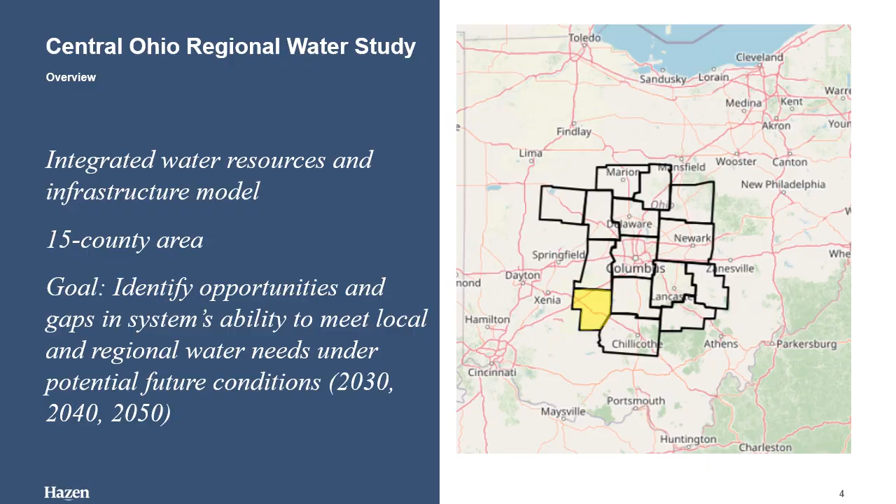Project objectives were identified for the Central Ohio Regional Water Study. The objectives include improve, maintain, and optimize resources while planning for growth. Results of the model were used to evaluate opportunities to secure safe and reliable water supply for public use, consider reuse water for non-potable needs, and identify areas of capacity limitations. Future solutions were required to maintain beneficial use of water required for recreation, wildlife, and economic growth.

Collaboration and regionalization: the project created a dashboard planning tool that will serve as a focal point for collaboration between utilities and state agencies, helping to ensure best use of both water and financial resources.

Maximize funding impacts through sustainable infrastructure improvements. Using the analytic capabilities in the dashboard, state agencies can now and will in the future be able to help identify funding to build the infrastructure needed to meet the long-term needs for the region and identify future needs. The project also provides information to the state agencies on how stormwater and surface waters will be impacted by growth and development. The project can be used to identify opportunities to help mitigate impacts of development on the environment.

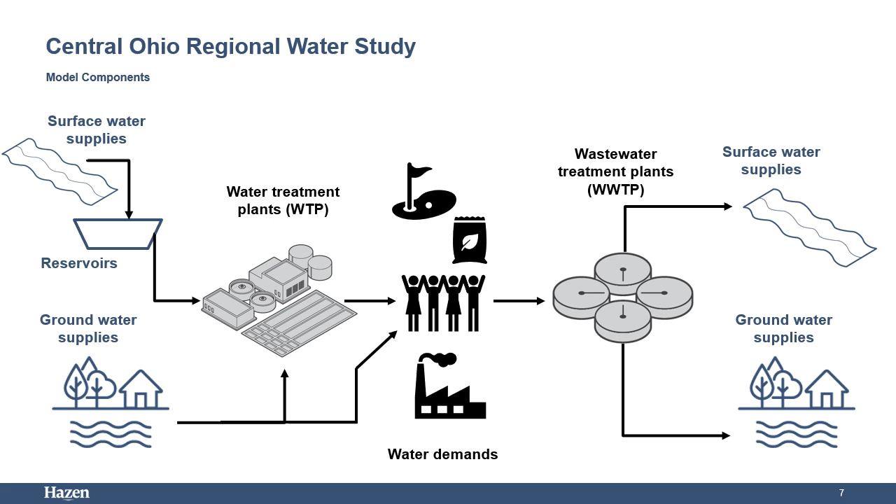This presentation will focus on the current and future supply and demand for water resources in Fayette County, estimated at the HUC 10 watershed level.

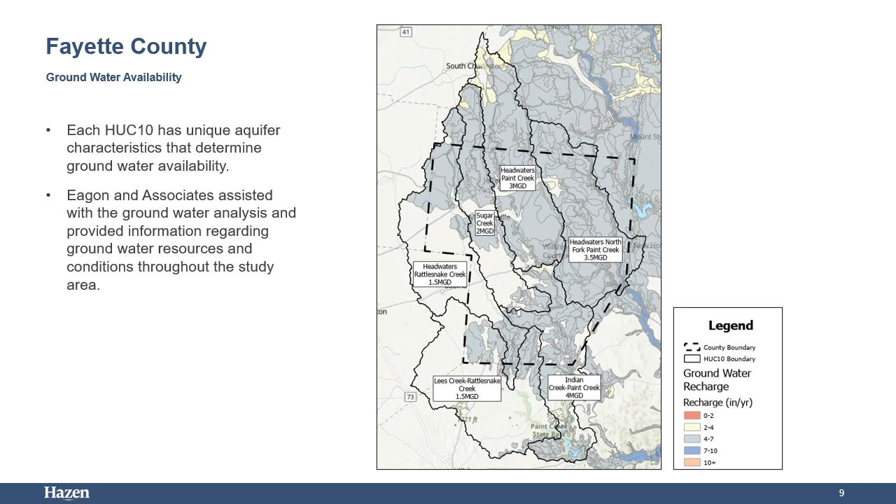Surface water availability is the cumulative sum of surface water from all watersheds in the county. However, surface water availability will vary for each stream location. Fayette County is estimated to have approximately 5.5 million gallons per day of surface water availability.

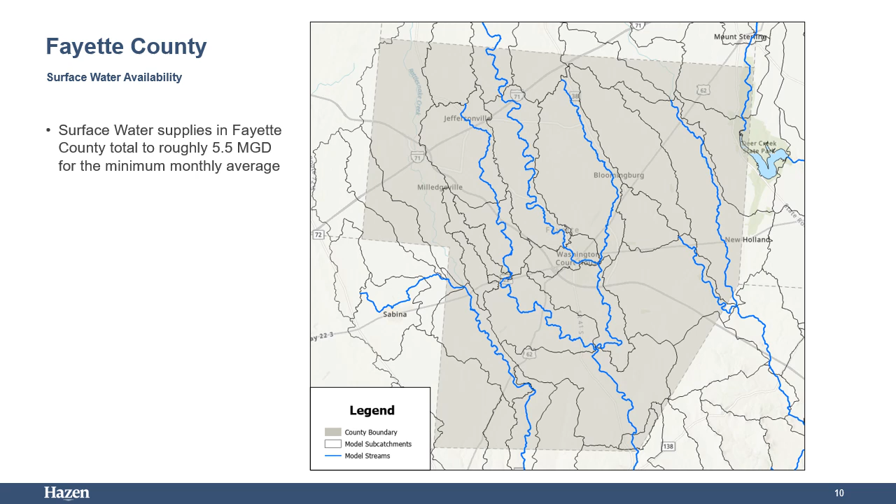Adding both the groundwater and surface water supplies together, it is estimated that Fayette County has roughly 21 million gallons per day of total available raw water supply. This supply availability is roughly 70% groundwater and 30% surface water.

Supply availability at the sub-county level varies by location based on aquifer yields and surface water tributary area, as presented on the previous slides. The next focus for this resource evaluation was the existing and future demands that draw raw source water from the available water resources.

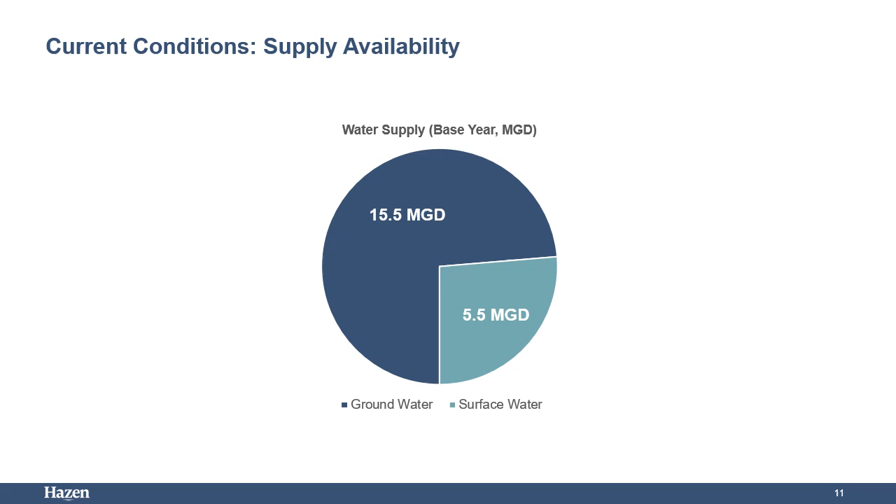Data on water demand was developed using population data, which was available on a regional basis. The information on current county population was obtained from MORPC, the Mid-Ohio Regional Planning Commission. These population data were used to further calculate water demand.

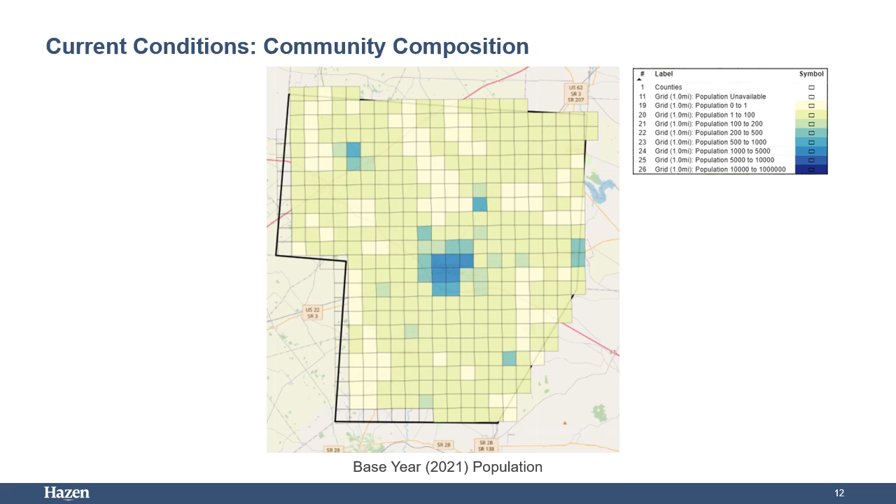The map on the slide is a heat map indicating the current estimated population distribution within the county. This estimate is for the year 2021, which is the year that the current conditions are based upon. Areas in blue tones are more densely populated, while the yellow tones indicate a less densely populated area. The darker areas in the center of the county indicate the population in the Washington Court House area.

A per capita water use was calculated for each service area. This was calculated by taking the water production data and dividing by the assumed population within a service area, which resulted in a per capita water use of gallons per person per day. This per capita water use includes all types of users within the service area, whether it is residential, commercial, or industrial.

It is important to note that in future conditions, no service area expansion was assumed, and the water per capita use for each utility was assumed to stay the same. This means that growth in projected population would also mean a proportional growth in commercial and industrial demand within the utility service area boundary. For future water demands, the per capita water use was multiplied by the assumed future population within a service area.

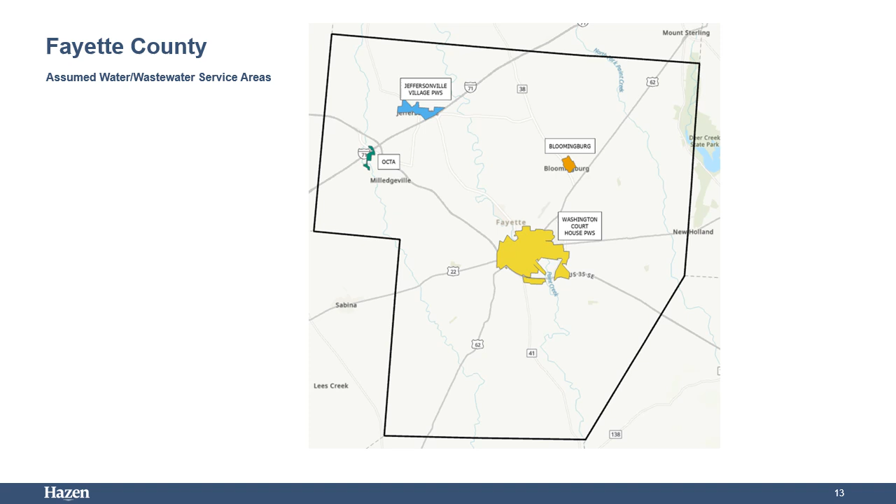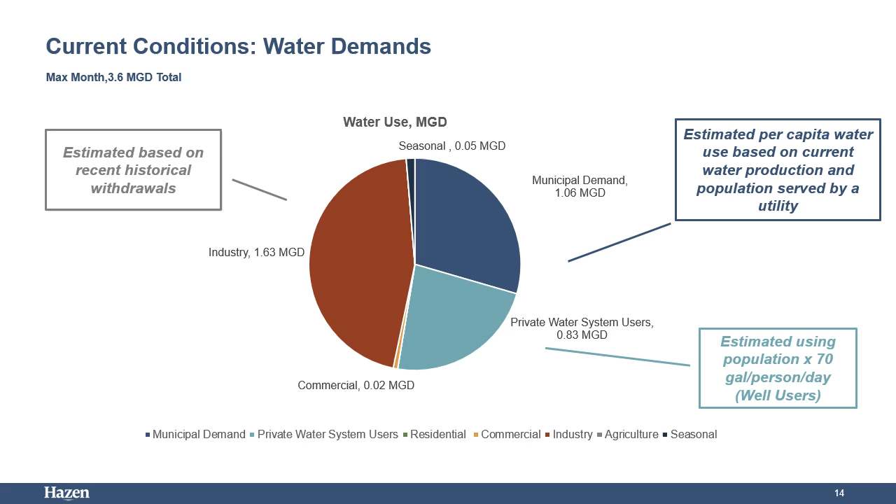The municipal portion, which represents the second largest water demand, also has an associated wastewater component. The wastewater flow component in the county includes the used water from the service areas in addition to an inflow and infiltration component, which was estimated and included in the wastewater flow.

For the current condition, the maximum annual average wastewater flows are approximately 5 million gallons per day at the county level. The annual average wastewater flows were analyzed rather than the maximum month flows, as was done for water. This is due to the wet weather impacts observed in wastewater due to the inflow and infiltration impact.

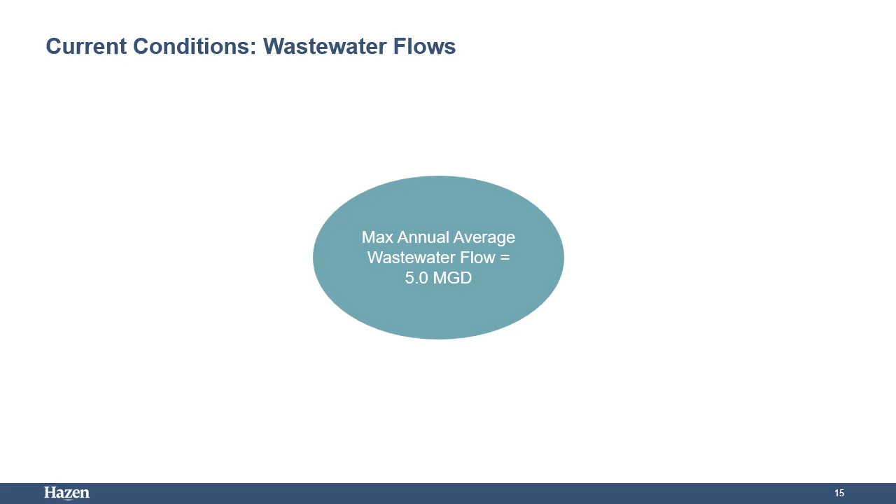During rain conditions, areas with combined sewer systems could see very high flow rates, while during dry times only the base flow is observed. High rainfall in a single month could skew the average. Therefore, an overall annual calculation is used to determine if a particular plant is nearing its permitted treatment capacity limit.

The existing demands and flows can be compared to the existing infrastructure. In Fayette County, there are a number of water treatment plant facilities, and their total capacity is just over 6.8 million gallons per day. Roughly 37% of that source water is pulled from groundwater and 63% is pulled from surface water, or the local streams and rivers. Remember that the total maximum daily water demands are about 3.6 million gallons per day. So, in the current conditions, the county has sufficient capacity to provide treated water to meet demands.

From a wastewater treatment plant capacity standpoint, the county has just over 7.3 million gallons per day of permitted capacity at the existing facilities across the county. The current maximum annual average wastewater flows generated by the demand and inflow and infiltration are about 5 million gallons per day. Again, the existing county infrastructure is sufficient to meet the current wastewater flows.

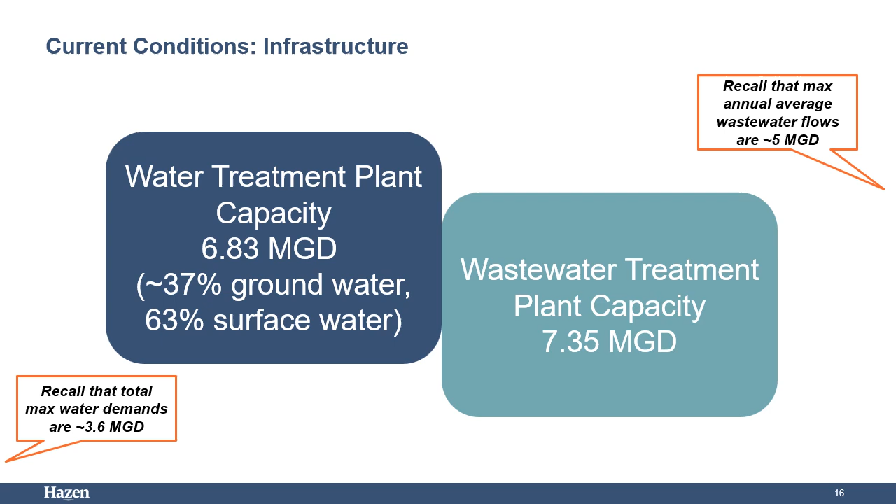With an understanding of the current conditions in the county, the next step was to expand the analysis and explore potential future conditions. This study evaluated conditions in 2030, 2040, and 2050. When analyzing future conditions, current data is projected from the present to the future in time. With that projection comes uncertainty, which is why analyzing multiple potential future scenarios can provide more resiliency and reduce the risk of failure. Scenario planning acknowledges there are several plausible future conditions that may occur and allows planning for several possible future conditions.

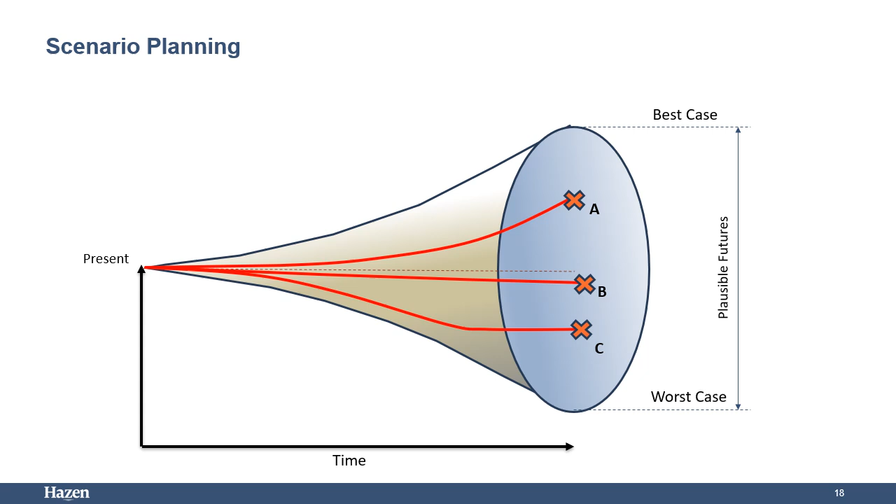On the left side of the cone, there is only one point because current conditions are known. As time goes on, the cone of uncertainty expands and the range of possible future conditions widens. The widening could indicate divergence among the scenarios and changes in the recommended project that aligns with that scenario. Analyzing several scenarios or plausible futures helps ready the region for ending up in future A, B, or C, and knowing the projects to implement all along the way.

Four model scenarios were developed to define the range of potential futures. Scenario conditions that were explored were two different precipitation and temperature changes and two different population estimates, totaling four different model scenarios. The different inputs of these scenarios will be explored further on the following slides.

Two population sources were used for the scenario modeling. The expected growth trend was informed by the Mid-Ohio Regional Planning Commission, or MORPC. The MORPC population projections were informed by local zoning and land use plans. The historical growth trend was informed by the Ohio Department of Development, or ODOD. The ODOD population projections are informed by historical birth, death, and migration trends. The population projections were used to estimate the future increases in municipal water demands and private water system demands over time.

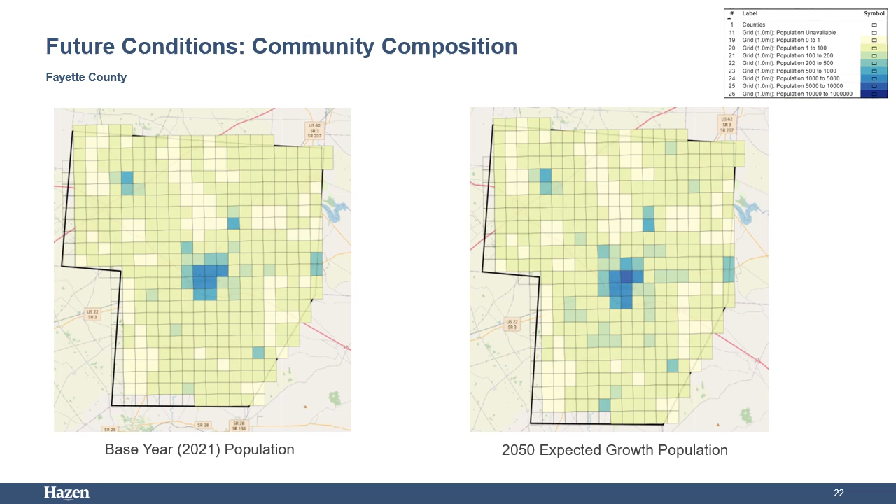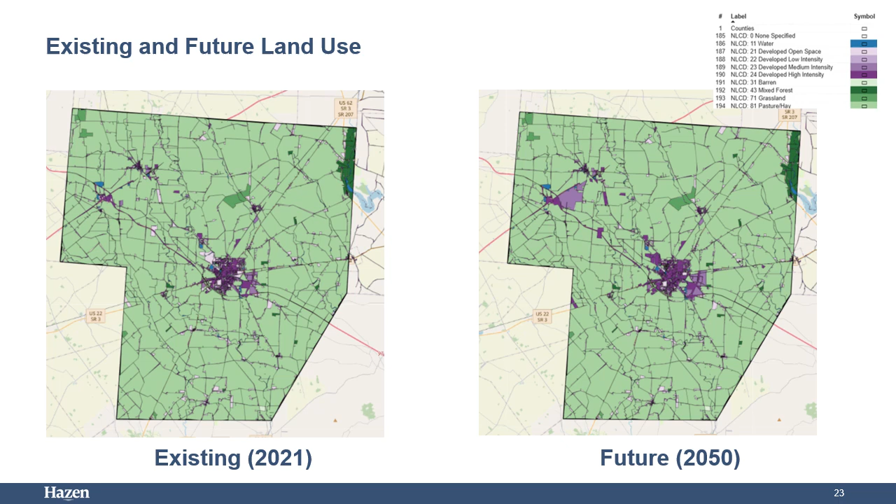Another element of the scenario modeling are the different temperature and precipitation scenarios projected. Historical precipitation and temperature data from 1983 through 2022 were used to estimate the surface water runoff and evaporation. For the future conditions, change factors were applied to the historical precipitation and temperature data to analyze the effects it may have on surface water availability.

Temperature and precipitation changes were based on the global climate model data downscaled to the Central Ohio area. There are different change factors for each month and future planning year, 2030, 2040, and 2050. Change factors were extracted from an ensemble of 49 global climate models from the Intergovernmental Panel on Climate Change.

Two climatic conditions scenarios were selected for evaluation of future conditions: a moderate climate scenario and a hot and dry scenario. The moderate change scenario represents the middle of the road and utilizes the 50th percentile change factor for both temperature and precipitation from the ensemble of global climate model data. The top left graph shows the 50th percentile change factors for precipitation, and the bottom left graph shows the 50th percentile change factors for temperature. As the graph indicates, there is a greater change projected for temperature over the planning horizon.

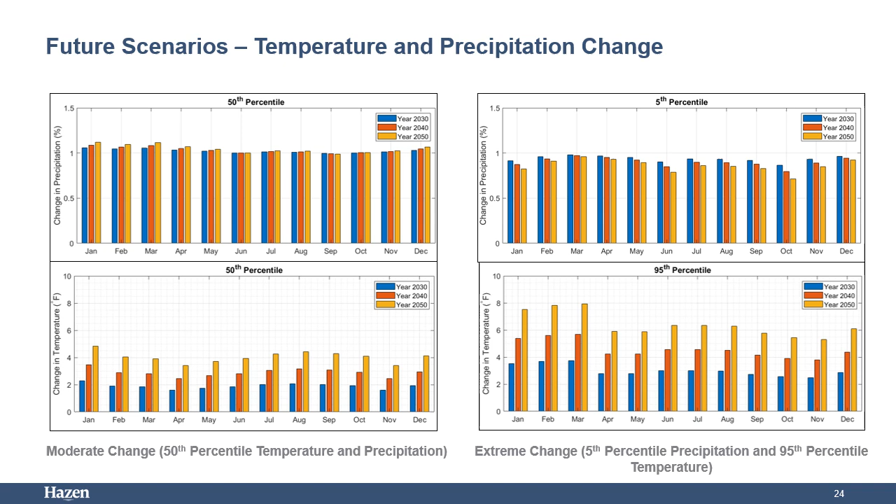The extreme change scenario that was modeled is the hot and dry scenario, which utilizes the 5th percentile change factor for precipitation and the 95th percentile change factor for temperature. The top right graph shows the 5th percentile change factors for precipitation, and the bottom right graph shows the 95th percentile change factors for temperature. A scenario with no future temperature and precipitation change factors was also evaluated. The two temperature and precipitation conditions affect the future raw water supply availability, as the two different population estimates affect the future water demands.

And lastly, the resource abundance scenario consists of the 50th percentile temperature and precipitation change factors and the historical growth population estimates. These 4 scenarios allow for planning of what different supply and demand conditions may look like and how those conditions compare to the infrastructure needed.

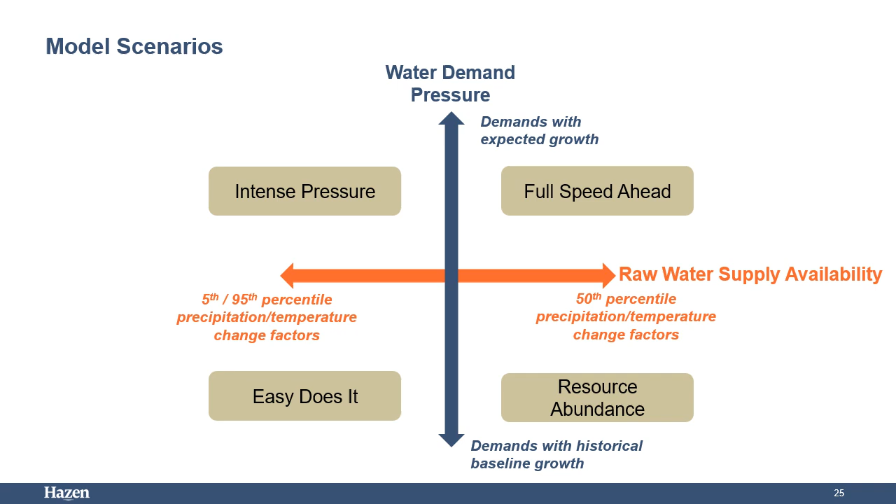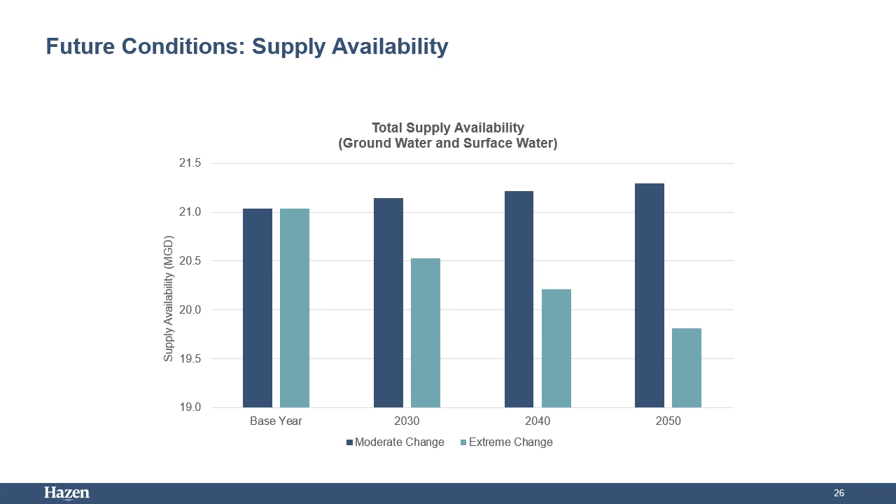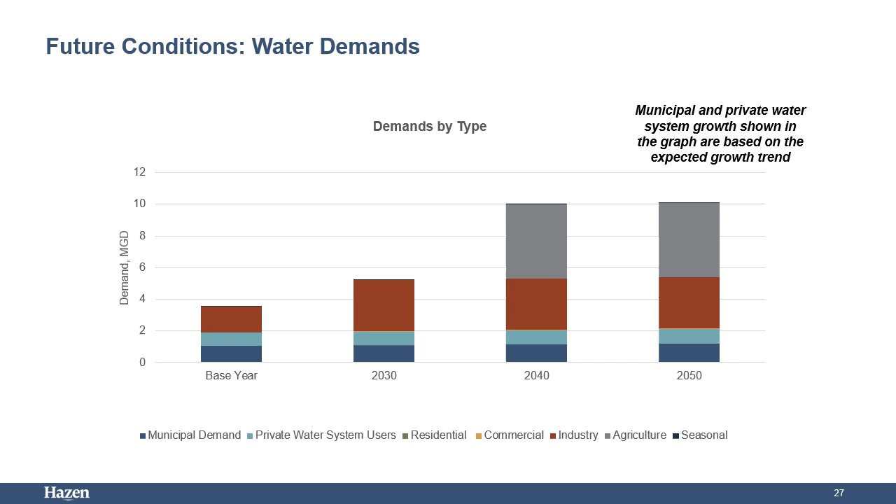The Ohio State University was consulted about assumed increases in future agricultural irrigation water demands. It is estimated that by 2040, agriculture fields will need at least 5 inches of irrigated water during the critical growing season, which occurs between July and September. Based upon this information, the team reviewed future land use to identify where agricultural fields are expected to be in 2040 and 2050, and calculated the water demand that would be needed for 5 inches of irrigation across those agricultural fields. These irrigation demands are present for the 2040 and 2050 condition and are assumed to use groundwater for source water.

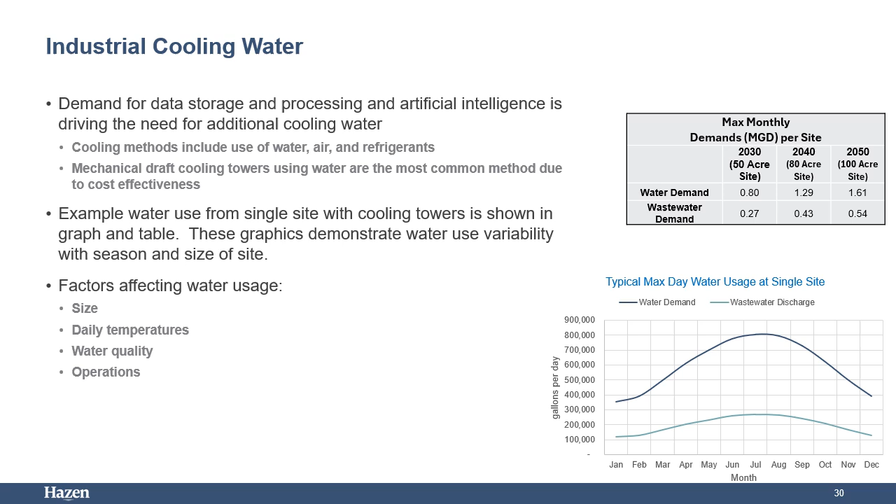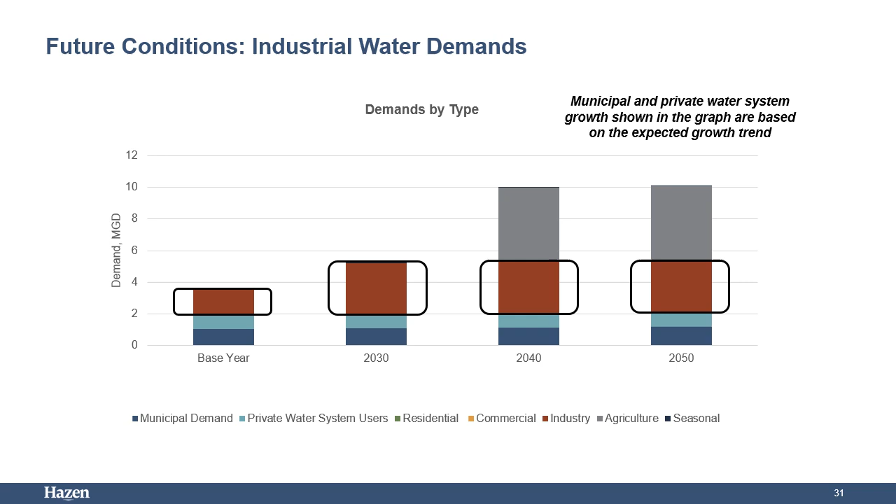Previously, the current water and wastewater capacities were explored at the county level. There are currently no future new or increased infrastructure capacities that were modeled for Fayette County. Therefore, the current water and wastewater capacities were assumed to remain constant through 2050.

Since the demands are less than the water treatment capacity and less than the raw water supplies for all years in the planning period, the treatment capacity and raw water supplies are sufficient to meet municipal demands at the county level.

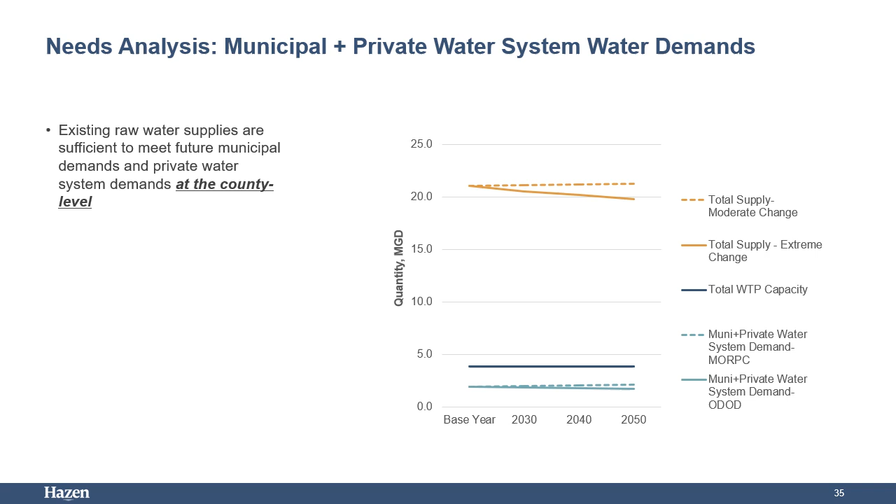However, it should be noted that a large industrial demand was not included in these figures, as its future water demand is met by another county outside of the study area. Though, with the growth of additional non-municipal, non-agricultural demands, water treatment capacity would be stressed.

Similar to the previous slide, these demands do not include an industrial demand that is met by another county outside of the study area. Additionally, future agriculture demands are not expected to be met by municipal water treatment plants, and therefore water treatment is not a limiting factor for growth in the county.

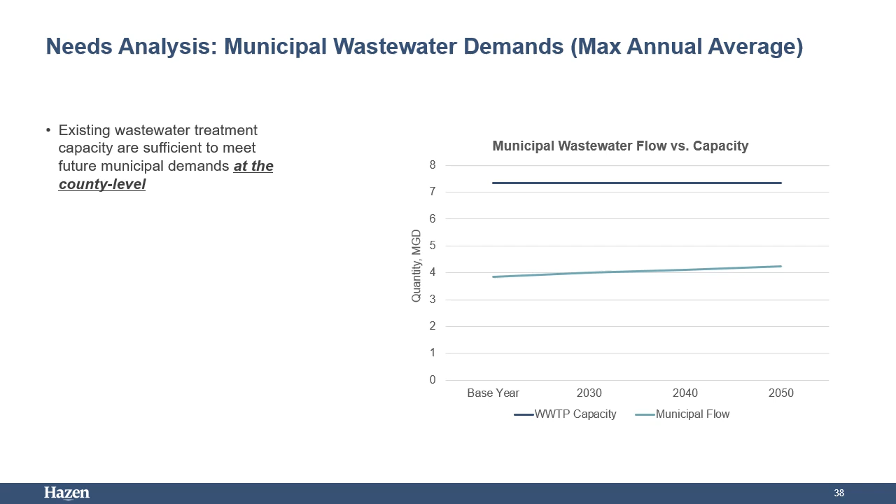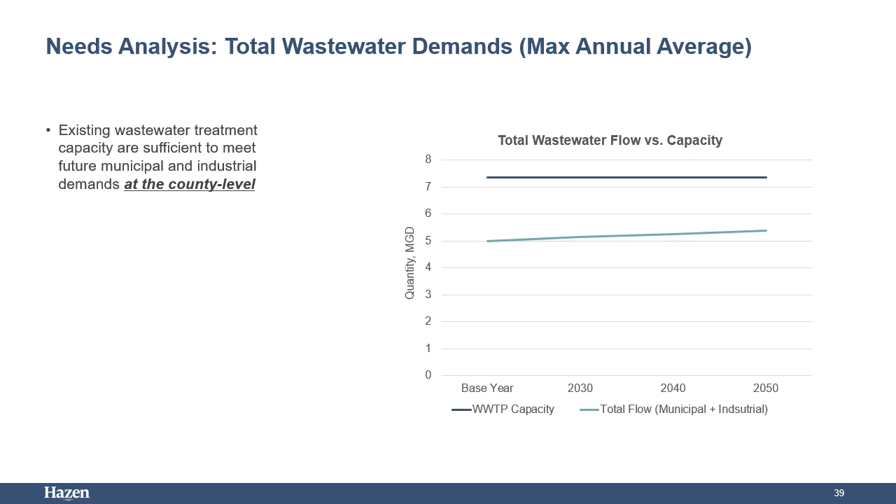The previous section evaluated supply and infrastructure availability relative to demands at the county level. This following section will address resource gaps and abundances when you consider where those supplies, infrastructure, and demands are projected to occur within the county.

Gap definitions are as follows. For a surface water node, is any shortage observed? For a reservoir node, does the usable storage ever reach 20%? For a groundwater node, does the remaining groundwater amount ever reach 0? For a water treatment plant, is the maximum monthly average flow greater than 80% of the permitted capacity? For a wastewater treatment plant, is the maximum annual average flow greater than 100% of the permitted capacity?

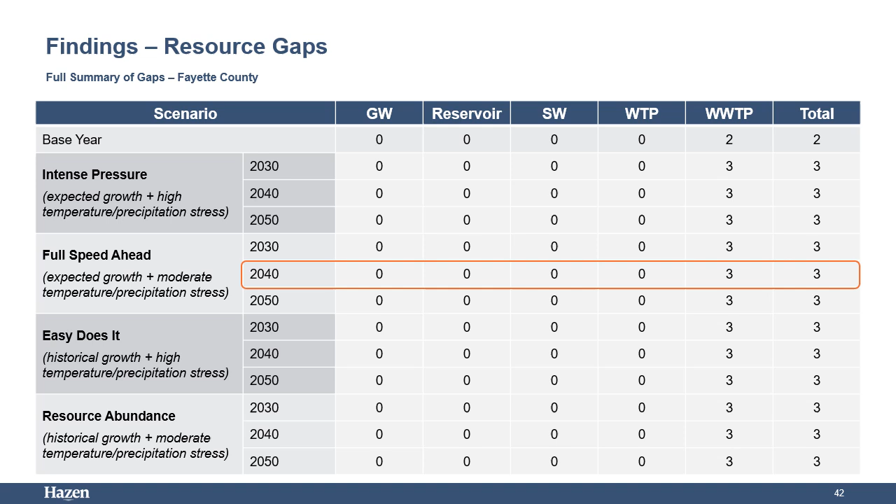Findings in the subsequent slides reflect the expected growth and moderate temperature and precipitation change in 2040. The 2040 full speed ahead scenario was selected as the target planning scenario to allow stakeholders to assess current and future project needs without extending too far into the future while using reasonable temperature and precipitation projections.

The following slides will provide detailed discussion of the potential projects that could fill identified water resource and infrastructure gaps within Fayette County. The project focused on identification of opportunities and strategies to fill those resource or infrastructure gaps.

Gaps can be filled through a variety of ways depending on the type of gap. For example, a supply gap could be filled by constructing a reservoir or implementing a policy to restrict use during times of low supply availability. Other solutions include expanding treatment capacity and leveraging reuse water.

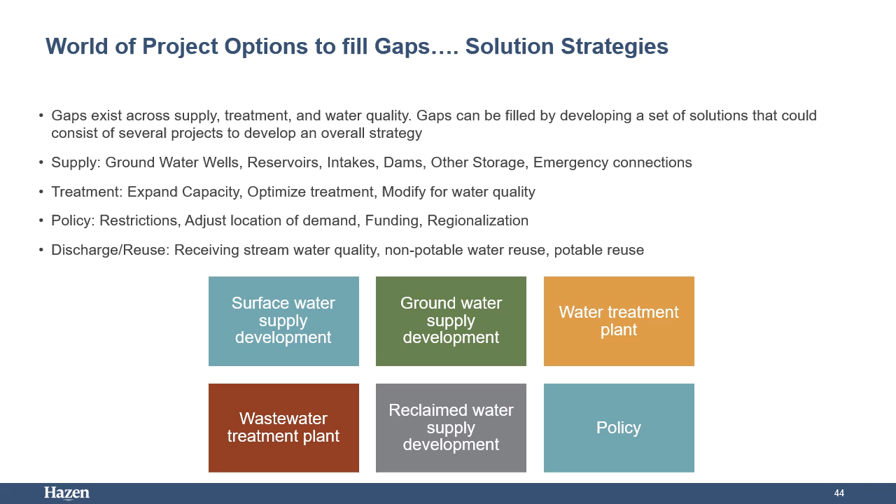Gaps are often filled with a project or a set of projects. A gap or set of gaps can be filled a variety of ways and can exist across some or all scenarios. A scenario scorecard was developed to assess the favorability of a project used to fill a gap.

Life cycle costs are another important consideration. The total life cycle costs include construction, operation and maintenance, and other projected costs.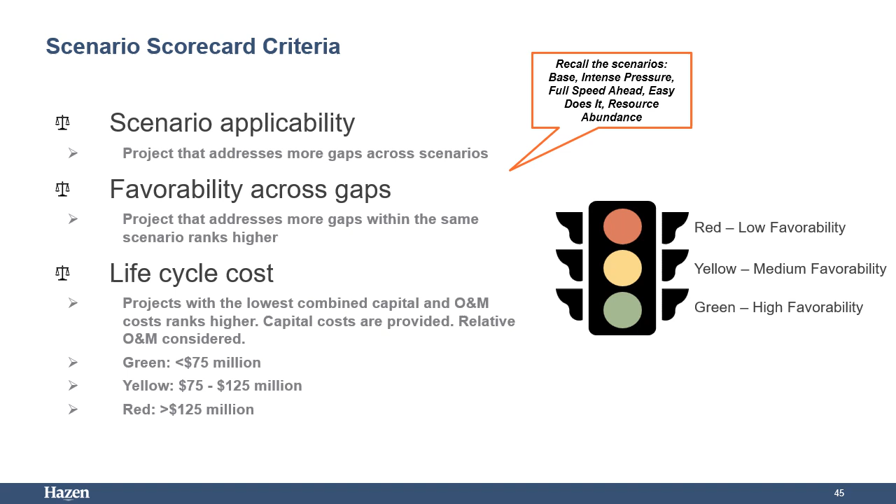Water quality impact considers impacts associated with development, as well as changing water and wastewater use. A project that provides higher protections to water quality ranks higher. Finally, a project with a shorter implementation time would be considered more favorable since the benefits of that project would be realized sooner.

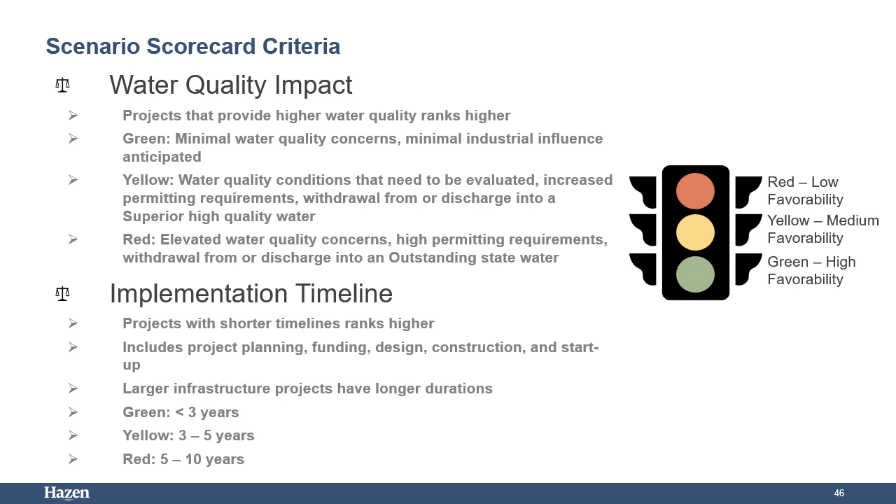The next few slides provide solution strategies for the 2040 full speed ahead scenario. Note that findings of the resource gaps were previously discussed and can be further explored using the dashboard planning tool. The dashboard facilitates scenario planning where gaps in other scenarios may also be filled with projects. Generally, the projects provide solutions for gaps beyond the 2040 full speed ahead scenario.

Pre-planning level projects are provided as examples and possible solutions to fill gaps. Additional efforts are needed to define, plan, and implement a project as outlined in next steps.

Further detail on these gaps is provided in tabular format on the next slide. Projects were categorized by type. Local, where the utility largely uses its own assets to fill gaps, or an industry provides its own on-site solutions.

Regional, where utilities collaborate with other utilities. And reuse, where a utility leverages reuse water to provide non-potable water to an industrial user to reduce potable water demand.

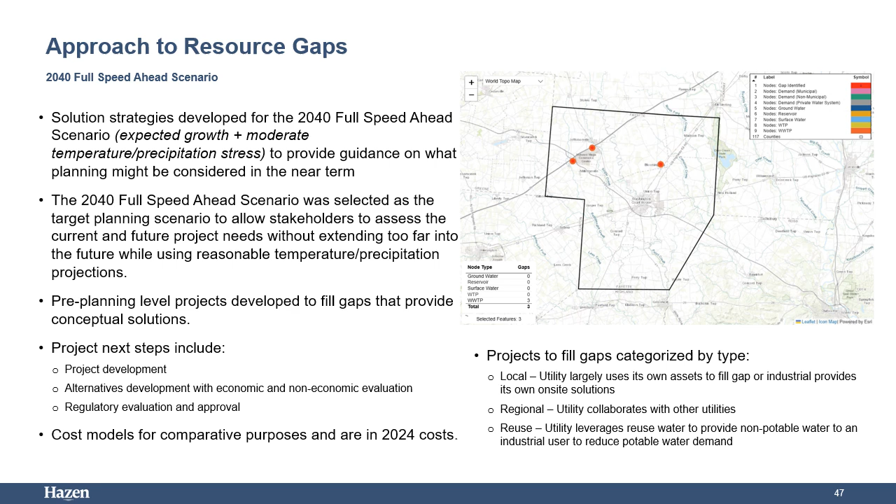This table provides detailed information on the projected resource gaps in the 2040 full speed ahead scenario in Fayette County. The Jeffersonville wastewater treatment plant has no industrial demand. The gap projected is entirely from municipal wastewater.

Rattlesnake treats both industrial and municipal water. The industrial water accounts for approximately 2/3 of the treated water.

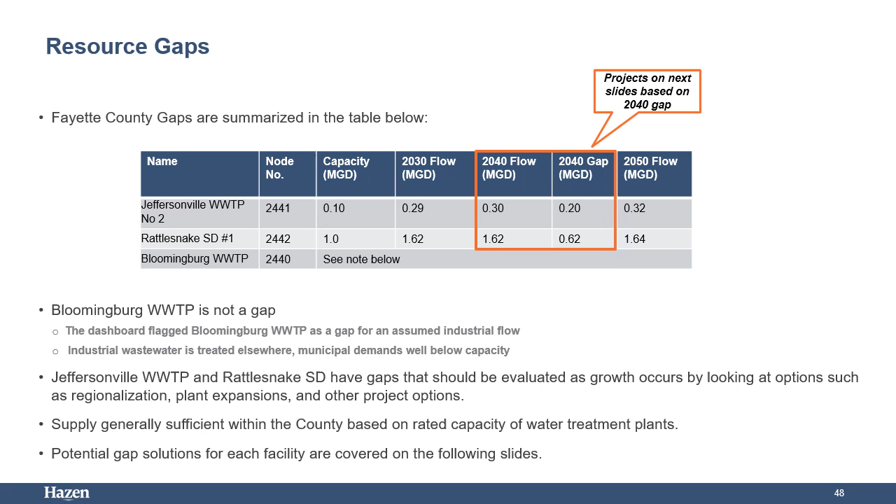Bloomingburg is flagged as a gap in the model because the nearby industrial waste stream was thought to be treated at Bloomingburg wastewater treatment plant. However, upon further investigation, it was found that the plant only treats municipal flows and the industrial waste stream is handled separately.

Jeffersonville wastewater treatment plant is expected to see increased flow from residential growth, which will create a gap of 0.2 million gallons per day. Conversely, no gap relative to water treatment is expected, as shown in Table 2.

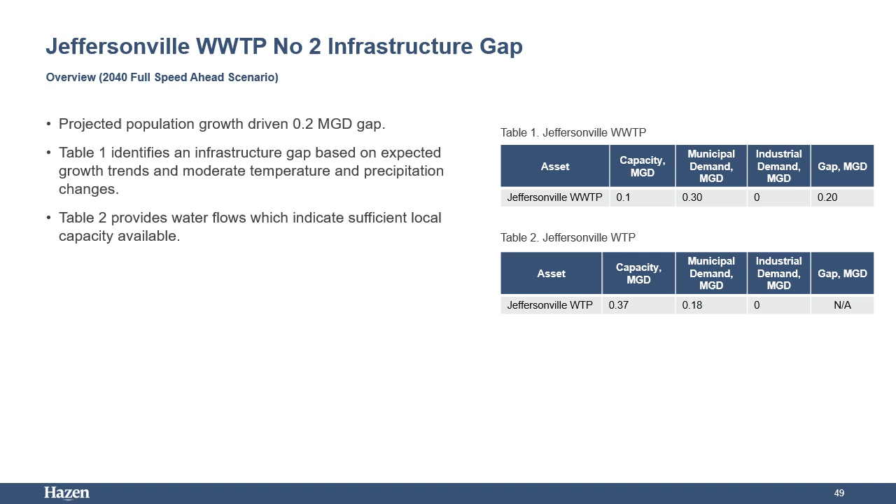Planning level projects were developed to fill the wastewater treatment plant gap. Projects were categorized by local, regional, and reuse, as previously discussed. One local project example is provided on this slide. Note that there are potentially more options which may arise if alternative future scenarios are considered.

In the table, each project is provided with a name, a list of projected infrastructure needs for water treatment plants, wastewater treatment plants, and conveyance. It should be noted that outside the fence or conveyance needs consist of distribution and conveyance piping that is needed to connect new areas and users. The conveyance needs estimates, when provided, are planning level.

The total cost is the sum of the projected infrastructure needs. Operations and maintenance, or O&M, is the ongoing effort or cost to run the facility. A numerical cost estimate is not practical at this planning level, but the order of magnitude is provided for reference.

Option A is to expand the wastewater treatment plant capacity by 0.3 million gallons per day, sized to meet the gap, plus additional capacity to provide for future users and operational flexibility. No water treatment plant upgrade is required. The total cost is about $24 million.

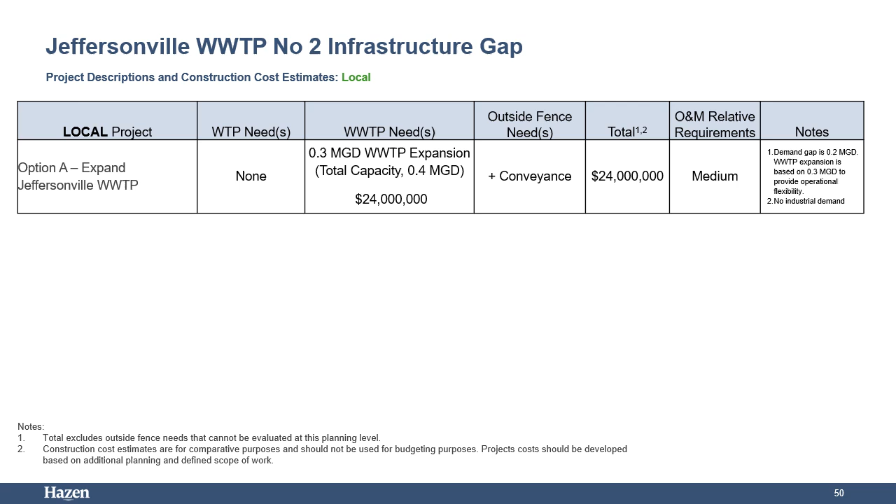This slide presents two regional options, considering potential opportunities to partner with other utilities. Collaboration with other utilities can create solutions that otherwise might not be possible. Benefits could include cost-effective infrastructure, shared costs, added technical capabilities, increased access to water supplies, and others.

One straightforward regional project could be an interconnection to another utility that has available capacity. Another potential opportunity could be construction of a regional facility.

Option B, listed in the table, considers the interconnection with Rattlesnake for wastewater treatment needs. The listed construction costs only include pumping stations and piping. Evaluation of other Fayette County infrastructure requirements would be required, including other costs, such as potential future connection fees and usage fees.

Option C reflects the construction of a new regional facility that would be shared across the area. This project has a high upfront cost, but may be a viable option if there is regional interest and support.

Rattlesnake Creek is the most likely discharge point for this facility since it has less water quality concerns than Sugar Creek.

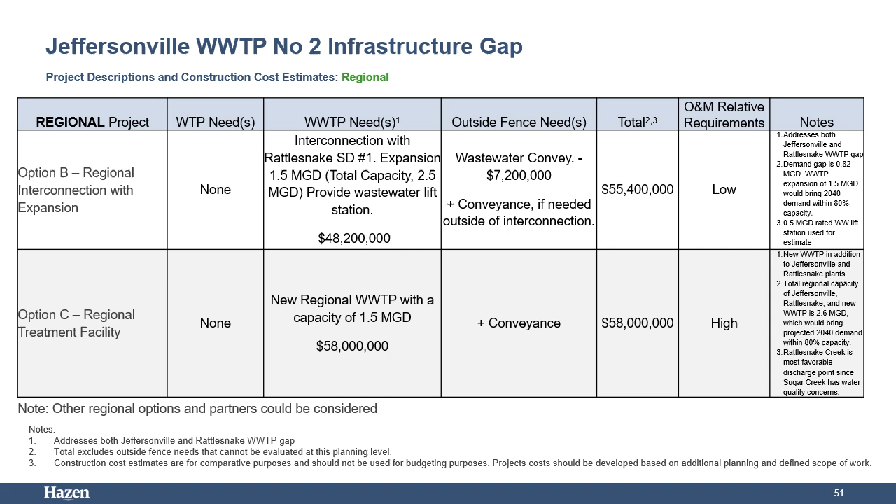The various options described as A through C were then evaluated using the project scorecard, with green cells indicating options with highest favorability.

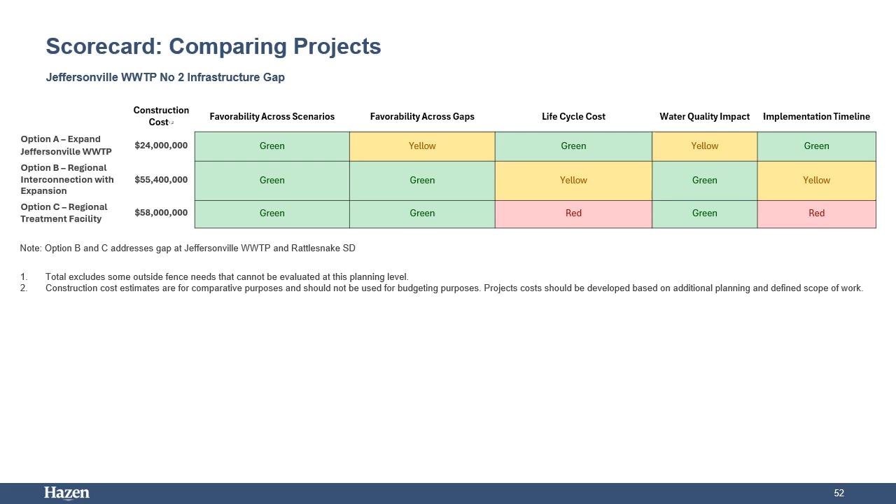The projected population and industrial growth are the drivers for this gap.

Table 1 identifies the infrastructure gap, which is largely related to the projected industrial wastewater demand. Table 2 provides projected water flows, which indicate sufficient local capacity is available.

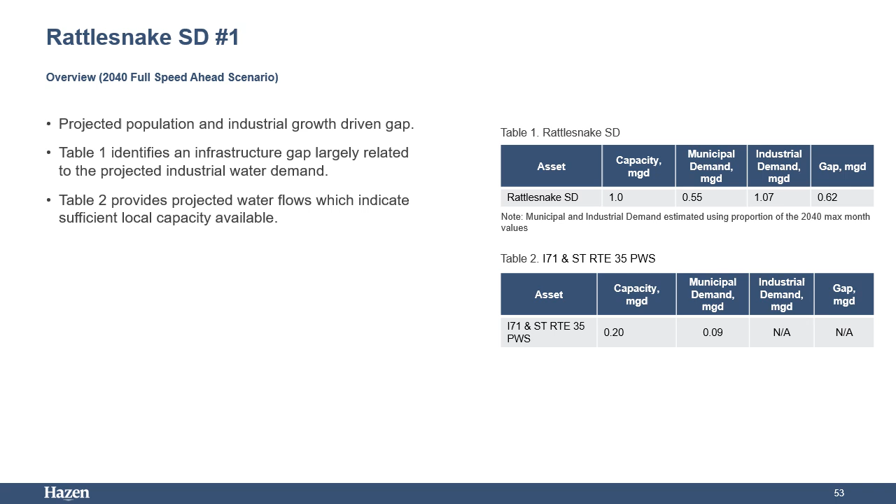Project examples are indicated on this slide. Note that there are potentially more options which may arise if alternative future scenarios are considered.

Option A is for Rattlesnake to expand the wastewater treatment plant by 1.25 million gallons per day, sized to meet the gap plus additional capacity to provide for future users. No water treatment plant upgrade is required. The total cost is about $39 million.

Option B is for the industrial user to provide its own wastewater treatment plant. If Rattlesnake just treated municipal water, the existing capacity would be sufficient.

Industrial users often do not require the same level of treatment as potable water, creating an opportunity for reduced treatment costs. Similarly, wastewater treatment plants for the expected type of industrial user tend to have lower treatment costs. The total cost is about $9 million.

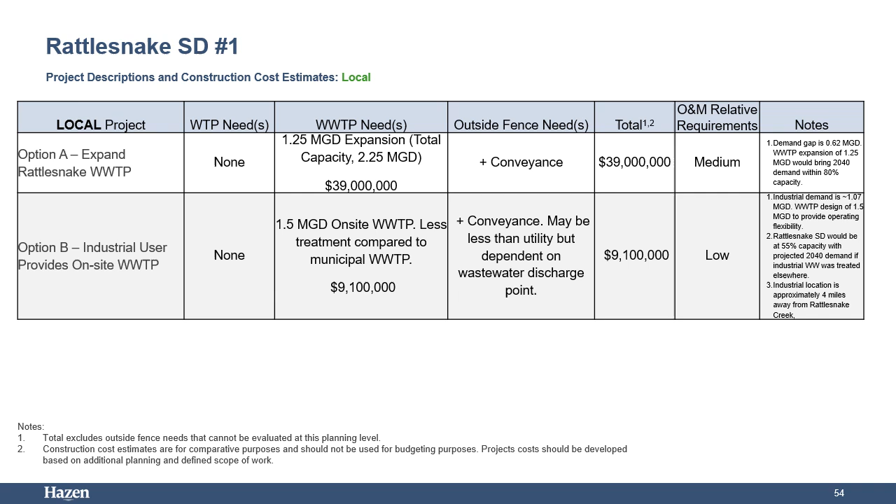This slide presents two regional options considering potential opportunities to partner with other utilities. Collaboration with other utilities can create solutions that otherwise might not be possible. Benefits could include cost-effective infrastructure, shared costs, added technical capabilities, increased access to water supplies, and others.

One straightforward regional project could be an interconnection to another utility that has available capacity. Another potential opportunity could be construction of a regional facility.

The first project listed in the table considers the interconnection from Jeffersonville Wastewater Treatment Plant to treat their wastewater. The listed construction costs only include pumping stations and piping. Evaluation of other Fayette County infrastructure requirements would be required, including other costs,

such as future connection fees and usage fees. The second project reflects the construction of a new regional facility that would be shared across the area. This project has a high upfront cost, but may be a viable option if there is regional interest and support.

Rattlesnake Creek is the most likely discharge point for this facility since it has less water quality concerns than Sugar Creek.

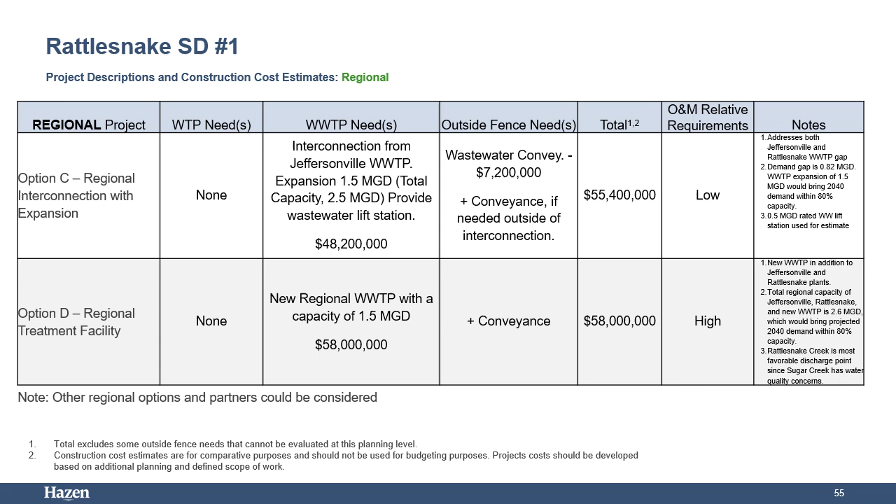Options A through D were then evaluated using the project scorecard, with green cells indicating options with highest favorability. Option B and C are both favorable. However, option C addresses the wastewater gap at both Rattlesnake and Jeffersonville.

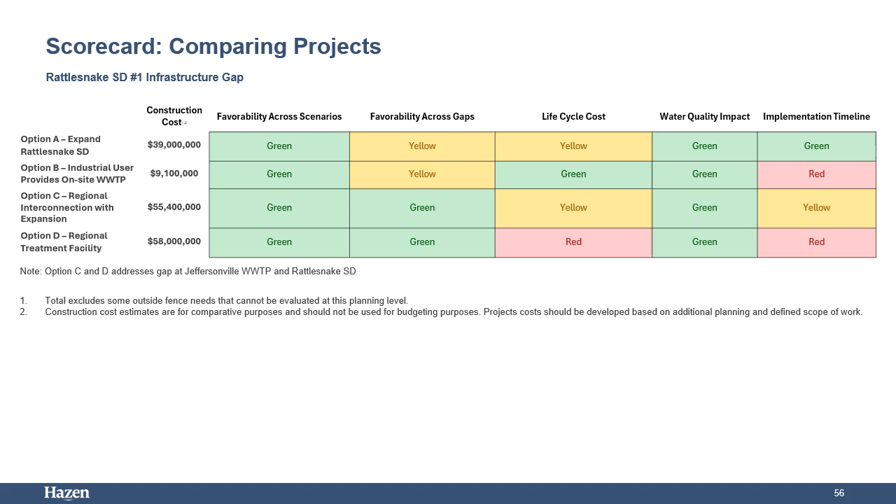This next section will present the evaluation conducted to determine areas of opportunity, which are defined as areas where there is assumed modeled surplus capacity. It should be noted that this section only identifies potential areas for opportunity. Project planning and utilization of surplus capacities will require further evaluation and discussions with local municipalities and stakeholders.

First, water supply areas of opportunity will be discussed. Raw water supply sources in the county have opportunity for growth.

There is surface water opportunity in the southern portion of the county, specifically in Paint Creek. Additionally, Washington Court House water supply reservoirs have available usable storage during their minimum storage month. Finally, there is less groundwater opportunity than surface water, but there is still some available groundwater opportunity throughout the county.

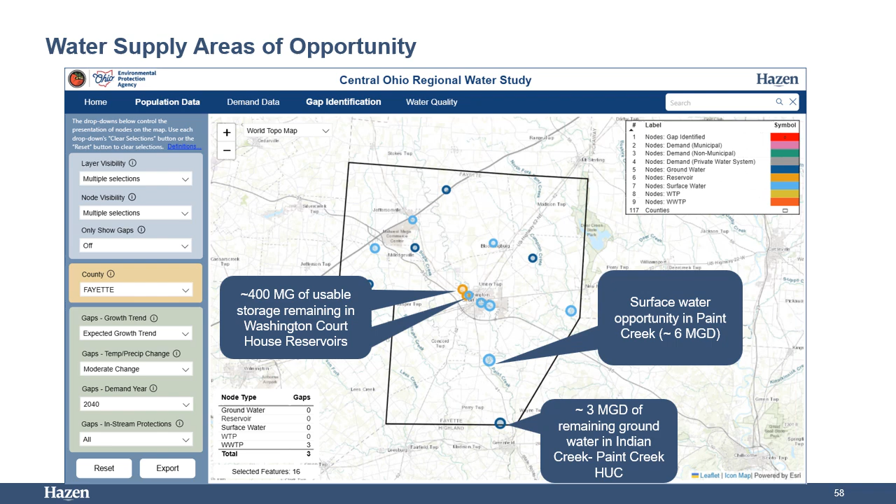Next, we looked at the areas of opportunity or surplus resource with regards to water and wastewater infrastructure. Though there are several infrastructure gaps within the county, there are also areas of opportunity.

Washington Court House has remaining water treatment plant capacity, which aligns with the raw water opportunity presented in the previous slide about the Washington Court House water supply reservoirs. Additionally, Washington Court House has available wastewater treatment capacity.

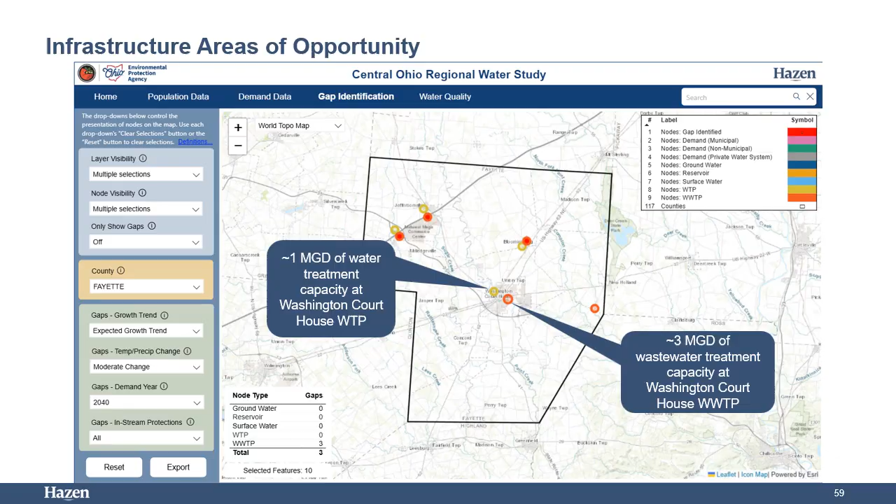This next section will present the project findings relative to projected water quality across the planning horizon. While the Central Ohio Regional Water Study was primarily focused on water supply and treatment capacity, the models developed were also used to project potential impacts to water quality that may occur due to changes in population, land use, infrastructure, and future temperature and precipitation changes.

The goals for the water quality assessment were to characterize existing water quality conditions. The study identified watersheds with the highest existing water quality. Such pristine watersheds were considered to be the most sensitive to future development.

Determine potential impacts: the study developed potential impact factors based on available data and the suite of possible future scenarios, including those evaluated for water supply and treatment. Watersheds were characterized as having higher or lower potential for impacts based on the identified impact factors.

The scenarios use a range of future conditions. The intent is to illustrate where water quality impacts will likely occur, and finally, to provide recommendations and activities that could be completed by local agencies, utilities, and organizations to help offset, mitigate, and protect against water quality degradation.

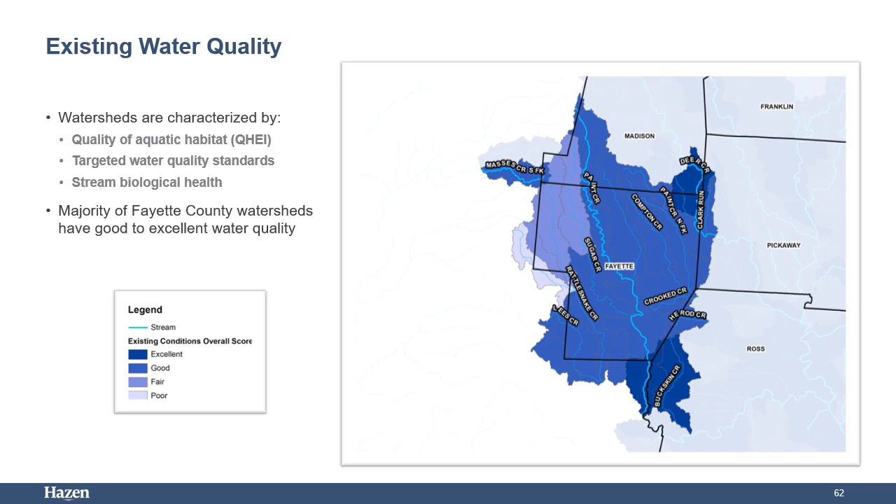Four factors were used to determine the potential for future impacts to water quality. The first was land use. The population and land use projections provided by MORPC were used to estimate the overall change in the percent impervious of the watershed as estimated to occur by 2030, 2040, and 2050.

Literature data has shown that increased impervious area in a watershed is typically correlated with decreasing water quality. As impervious area increases, the overall stream water quality tends to decrease.

Second is hydromodification. When streams see higher flows and/or more frequently occurring storm events, stream banks may experience increased erosion. With these flow changes, streams may become incised and disconnected from floodplains, resulting in a decrease in water quality and increase in suspended solids.

Next, increased occurrence of low flows. During dry weather conditions, healthy streams may typically maintain base flows to support aquatic life. If the low flow periods are extended or flows are projected to be lower under future conditions, it could have a negative impact on water quality due to loss of aquatic habitat and could therefore lead to more restrictive permitting requirements.

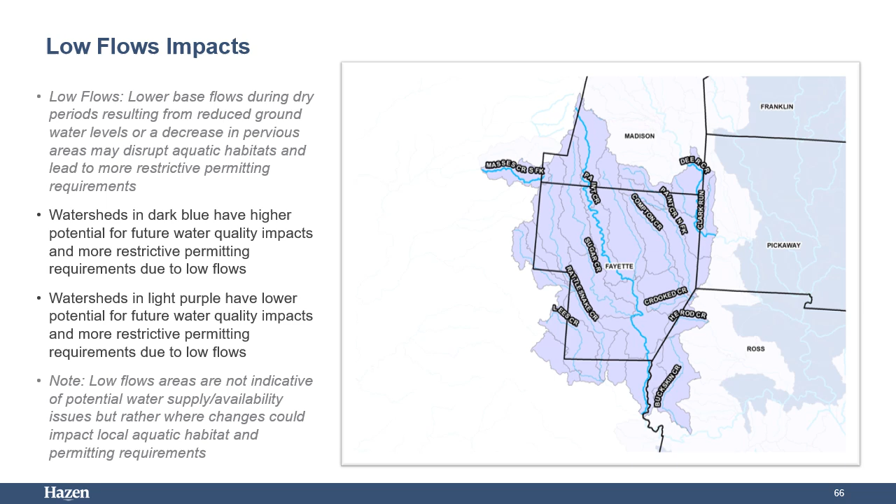Temperature and precipitation. Changes in temperature and precipitation were considered in multiple scenarios. The stream model was again used to evaluate the impact of temperature and precipitation conditions during low flows. In some watersheds, the impact of the changing temperature and precipitation on stream flows was found to be more significant due to lower flows during dry conditions, especially areas that were not able to offset low flow through either wastewater treatment plant effluent or increased runoff.

The model used 40 years of simulated stream flow to determine the impact of different scenarios on projected flows during drier periods. In some watersheds, the impact of temperature and precipitation on stream flows was found to be more significant due to lower flows during dry conditions that were not able to be offset through either wastewater treatment plant effluent or increased runoff. Watersheds in dark blue have higher potential for future low flow impacts due to temperature and precipitation change.

A high impact, hot, dry, temperature and precipitation scenario was compared against a medium impact temperature and precipitation scenario. For the high impact scenario, if the base flows were lower than those in the medium impact scenario, then the watershed was flagged as having a higher potential for water quality impacts due to temperature and precipitation conditions. In some cases, high temperature and precipitation impacts were found to be slightly offset through increased wastewater treatment plant effluent and additional runoff from impervious areas.

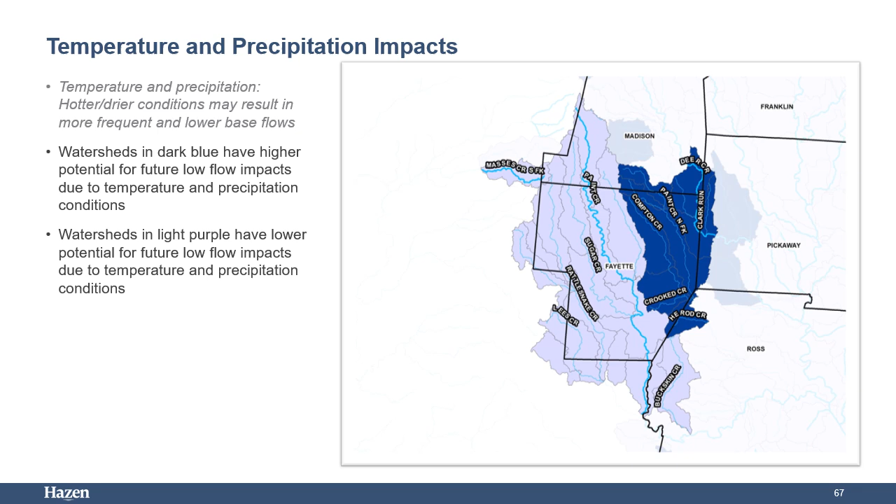The Central Ohio Regional Water Study Dashboard can be utilized to examine individual watershed characteristics and identify watersheds with excellent water quality and high potential for future impacts. Those watersheds can be considered and prioritized for protection, conservation, and restoration activities. Several potential mechanisms are available for water quality protection.

With potential water quality impacts identified, considering water quality protection is the next step. Water quality protection is a critical part of any water resource plan. It is important to understand that streams are constantly changing due to a number of factors, including vegetative communities, adjacent land uses, and changing temperature and precipitation. The magnitude of change over the next few decades will vary across the region and is subject to several variables.

Current development plans indicate that development pressure is being increased in areas that are rapidly developed. Proper protections should be in place prior to development and significant land use changes in order to protect local water quality while supporting economic development. Proactive watershed engagement may reduce or eliminate negative impacts of development on water quality. Four categories of solutions should be considered, including policy, partnerships, data, and funding that could be used to help offset or mitigate any potential future water quality impacts.

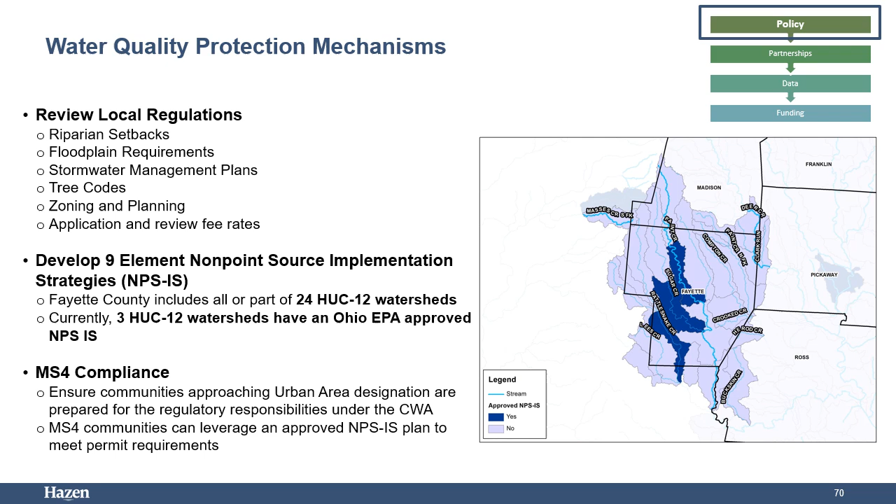MS4 communities can leverage a NPSIS plan to meet permit requirements by identifying watershed-specific strategies and projects that improve water quality. By integrating data collection efforts from NPSIS plans into MS4 compliance activities, municipalities can improve regulatory efficiency, strengthen funding opportunities, and enhance water quality improvements.

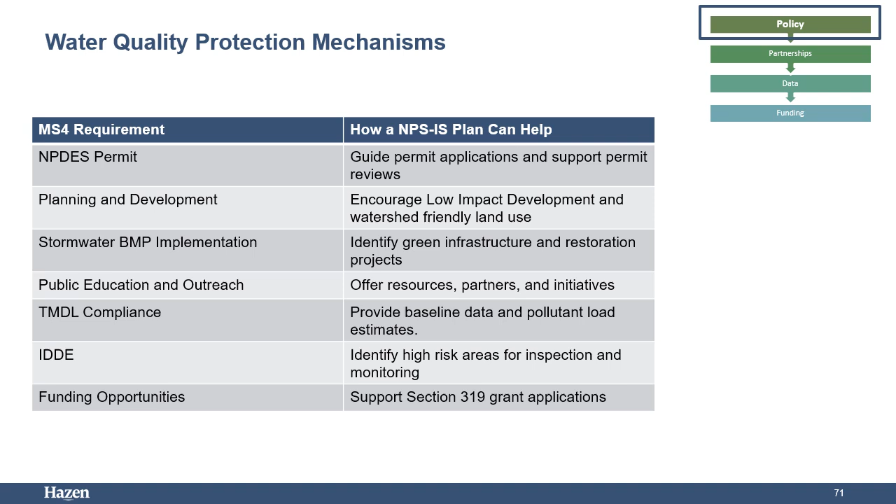Strengthen partnerships between municipalities, watershed organizations, and other local governmental agencies. Communities don't need to work alone. Planning efforts are typically developed with input from state and local agencies, watershed groups and nonprofits, soil and water conservation districts, and universities and research institutions.

By coordinating efforts with these stakeholders, communities can collaborate, get together and coordinate current issues and upcoming plans, meet regularly to discuss trends, projects, and upcoming plans. This can be outlined in stormwater master plans and can be expanded upon to involve additional stakeholders to discuss overall watershed action items. Invite guest speakers to learn about new opportunities. Representatives from existing partnerships or outside agencies can share success stories, lessons learned, and upcoming opportunities for projects and funding.

Delegate data collection and permit review responsibilities. Ensure responsibilities are delegated appropriately and that all partners have the resources they need to carry out said responsibilities. Link data between agencies through GIS. Pull the data collected and create a GIS database that is linked. This allows for partners to readily use data that is already available.

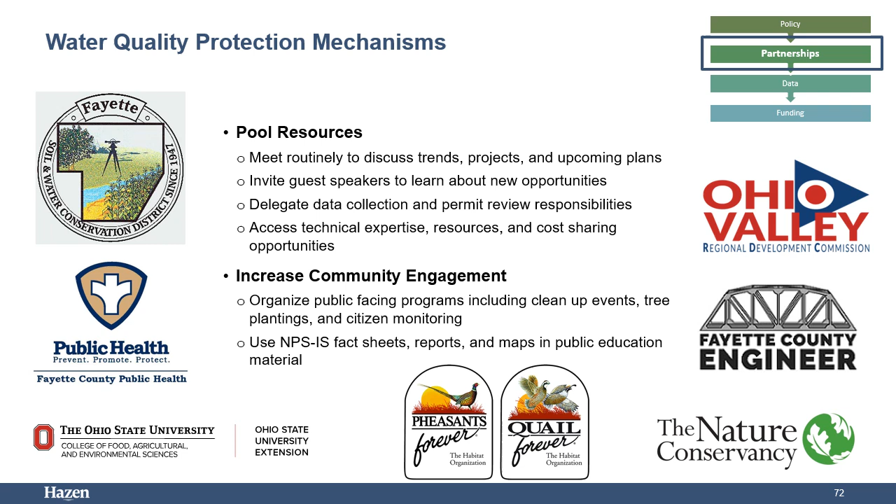Monitor water quality. Bolster local data collection efforts through training and certification programs. Monitor development impacts. Implement long-term monitoring programs to assess the cumulative impacts of population growth and development on water resources.

Educating communities about the importance of water conservation and pollution prevention can encourage responsible behavior, and involving communities in data collection is a great way to encourage grassroots efforts to take place. Use monitoring data to inform revisions to watershed management plans and policies, ensuring they reflect current and future challenges posed by population growth.

Digitize records. Encourage the use of GIS viewers to store available data collected by various governmental and public entities. Digitize existing record drawings and georeference new development records as they are constructed. Ensure data is collected equitably across the county, focusing on watersheds with high quality features and those experiencing ongoing issues or areas adjacent to and notably downstream of new development.

Public reporting. Collect observations of flooding, erosion, and general water quality and store records digitally for analysis and reference. This will help identify areas of concern that are being felt by the community. Share monitoring results with the public and stakeholders to increase transparency and accountability.

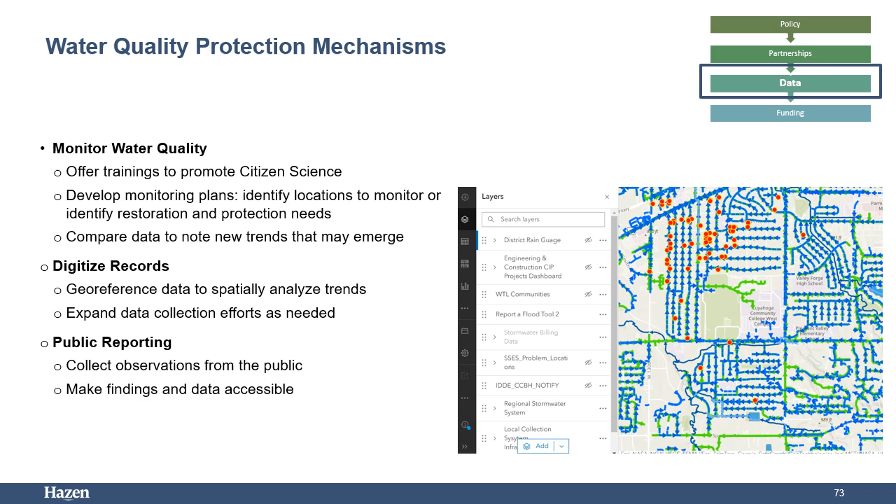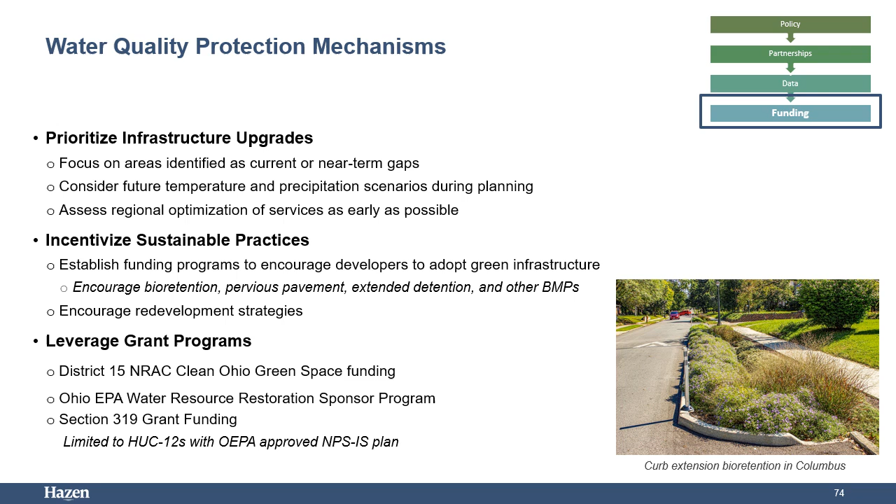H2 Ohio provides funding through H2 Ohio Rivers and H2 Ohio Wetlands. The Rivers program has several grant funding opportunities. Those that are applicable are listed, as well as the coordinating state agency.

Agricultural Incentive Program. In 2024, Governor DeWine announced a statewide expansion of H2Ohio producer initiatives, making the initiative available for the first time to producers who farm outside of the western Lake Erie Basin. For the first round of statewide enrollment, ODA offered enough funding and resources to enroll a new 500,000 acres outside of the western Lake Erie Basin. More than 525 producers in 51 additional counties enrolled in 2024.

The program incentivizes farmers to implement science-based, proven best management practices to prevent nutrient runoff and improve water quality. ODA works closely with county soil and water conservation districts to administer participant contracts, provide technical assistance, and support producers.

The U.S. Department of Agriculture and the state of Ohio are partners in implementing a voluntary Conservation Reserve Enhancement Program, CREP program, to enroll up to 67,000 acres of agricultural land in the Lake Erie watershed and to enroll up to 70,000 acres of agricultural land in the Scioto River watersheds within the state of Ohio.